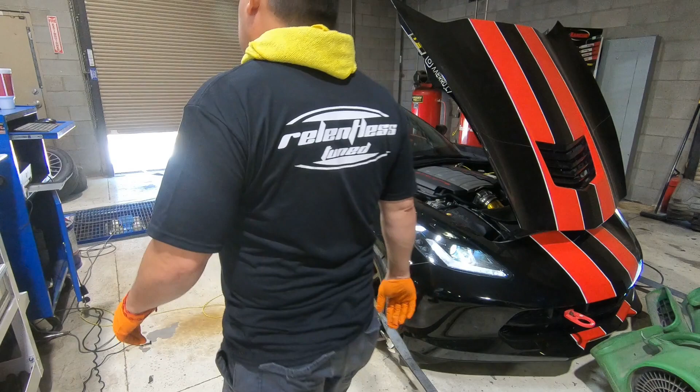So this pull you guys just saw is with the stock tune with the Texas Speed headers. My mistake, at first I said it came in with 400 wheel completely stock. It actually came in with 388 - I just looked at the chart. Right now we hit 401, so that's still pretty impressive gains. The car ran safe, AFRs were actually still pretty rich, so that's a good thing. Timing was good. That being said, it is safe to run the long tube headers without the tune, as long as your cold air intake is stock or behaves like stock. In other words, if you have a bigger intake like a Rotofab or the 5-inch intake that some people are selling, you will most likely require a tune because the MAF housing is bigger and will throw the air calculations off and run the car on the lean side.

So let's go take a look at the numbers with just the long tube headers. Check it out.

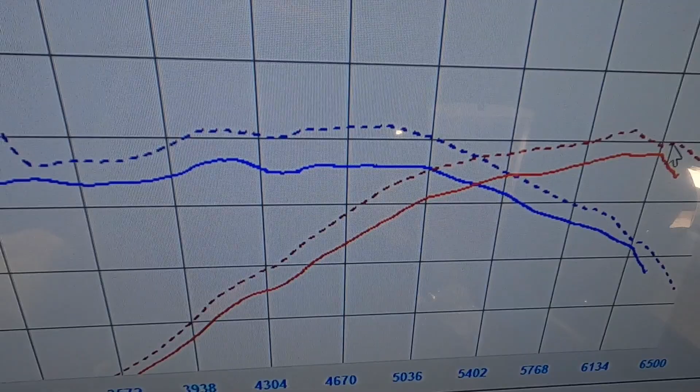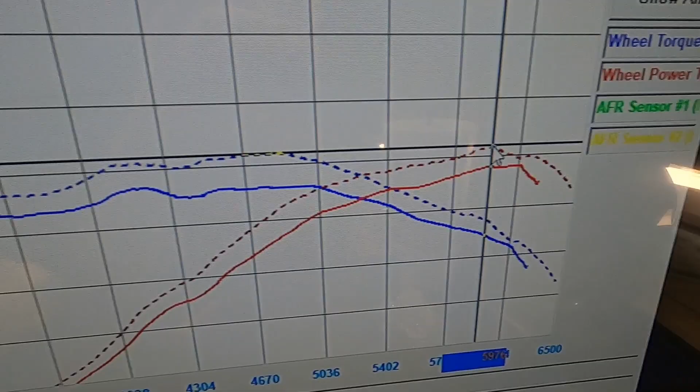So, like I said, these are the Texas Speed long tubes. They do have the high flow cats, and it's a completely stock tune. These are the gains - right here at 6 grand, we came in at 388, and now we're at 401. So the headers alone gave us around 13 horsepower peak, and we saw a little bit more down low. We did pick up a ton of torque - we're at 400 when before we were at 380, so we picked up 20 foot-pounds of torque, which is insane. Let's find out how much a tune will give us.

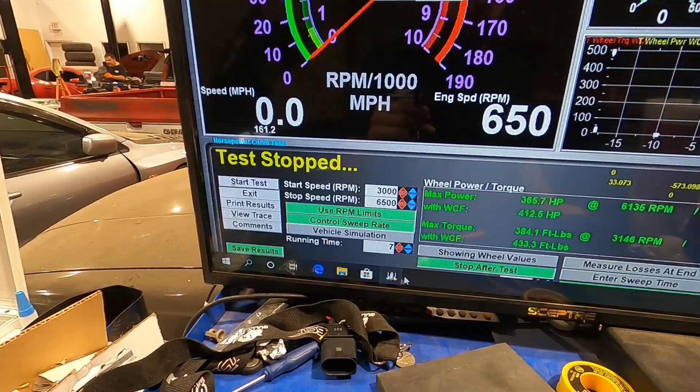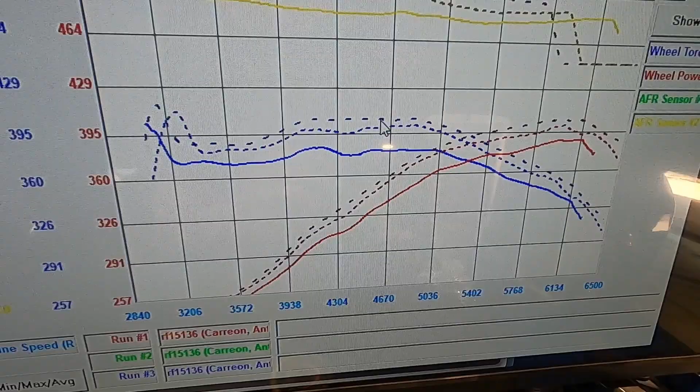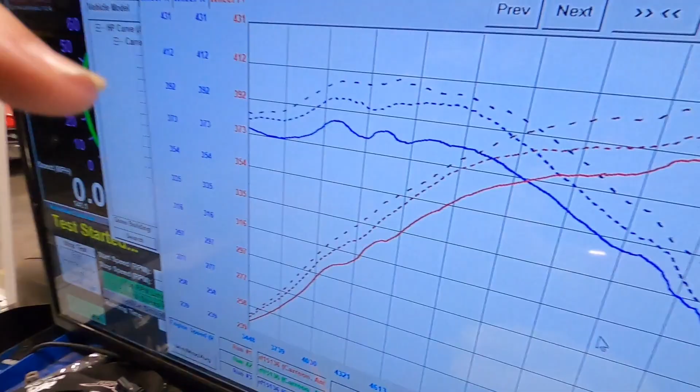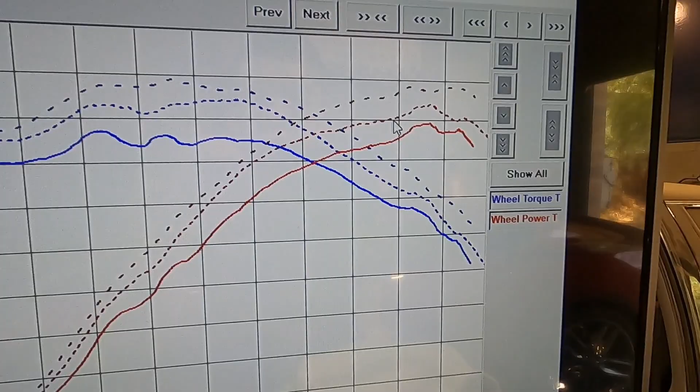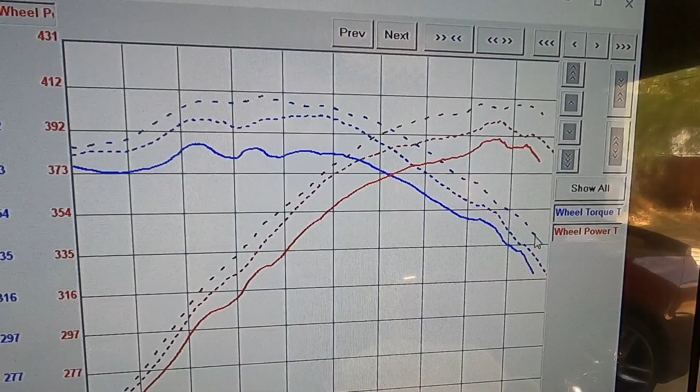All right, so I'm about to show you the gains we had with Anthony's car. I was actually pretty happy with it, so check it out. We are looking at a total of 409, and it came in with a peak of 391. So that's around 17 horses - nothing crazy peak, but we picked up way more torque, which is what I was kind of aiming for. You guys can see right here, we were at 385 and now we're at 409, so that's around 24. But then again, we lose a lot of resolution to the smoothing factor. I have to have it set at 50 because it takes quite a bit - it looks really choppy if I don't. So we picked up approximately 20-30 horses. Mid-range we picked up a lot more than we did top end - we're at 371 here, 393 there, so that's 22 horses. So overall it didn't do too bad.

Alright guys, so that wraps up Anthony's car.

Now, you guys may have noticed the change in seat color. That's because this is actually Matt's C7 now that I'm working on. I just got done dialing in the new E85 with the new exhaust. If you guys recall a few episodes back, we were having issues with his knock sensors. His exhaust was extremely loud, so we went ahead and added some Vibrant resonators, cleaned up the exhaust tone. Sounds extremely wicked, it's super loud, and it helped control the knock sensors a bit more. So that car is super happy, and I'm happy as well because I can now feel comfortable with the car being out on the road with better timing, a little more aggressive, relying on the knock sensors picking up any weird thing instead of having the car super conservative as it left before, even for E85. So let's go look at his new numbers, guys.

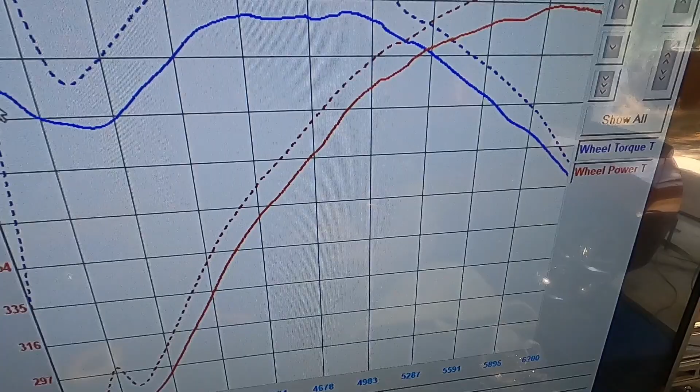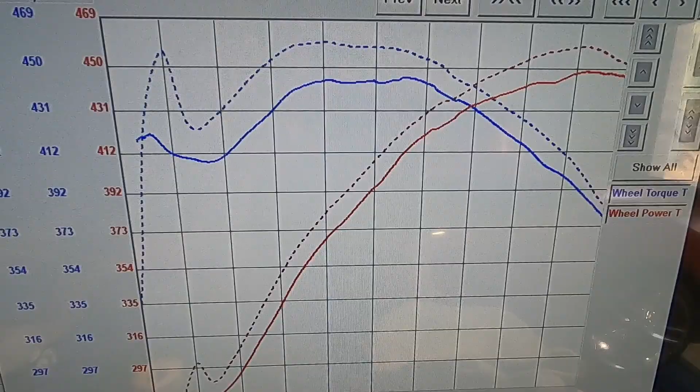Just check out that new graph, man. As always, solid is his previous tune, how it left with the previous exhaust. The new dotted line is where we're at right now. So it's just a lot of gains to be had. Unfortunately, I already erased the numbers, but yeah, so picked up around 10 horsepower and 15-17 foot-pounds of torque. So let's do one last pull just to verify everything and get going.

So even the end cap sounds a lot better. I'm extremely happy with the way it sounds. So Matt, I hope you're happy as well.

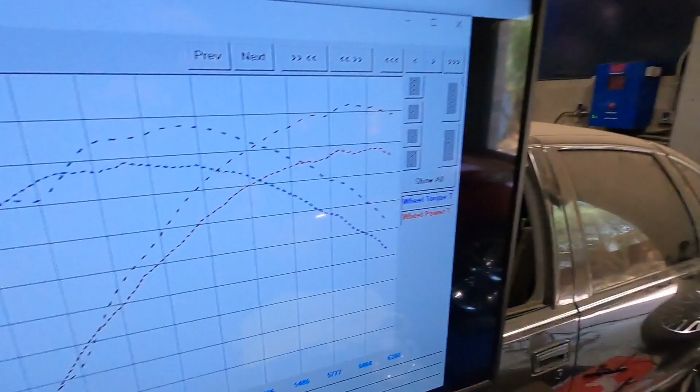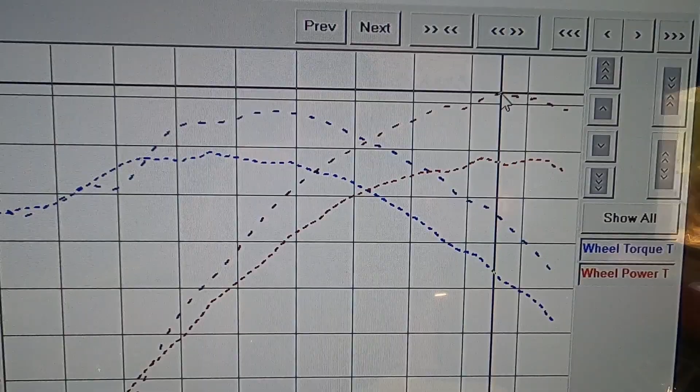So this one right here is Matt's versus Anthony's, and the only difference in these two numbers is that one is on manual and the other one's automatic. So you guys should be able to tell the difference right away. These were both on the 91 tune, about the very similar timing. So here it is - just top end, it's insanely different. Matt left with 435 on 91, and this car has a peak of 409. So it's about 20 horsepower that we're losing through the automatic transmission. It's kind of sad how much the 6-speed actually robs us. So obviously with some tuning we can firm up the shiftness and have it shift a little bit sooner, so at that point it kind of makes up for the manual if you're a slow shifter. But here it is, man, the numbers don't lie.